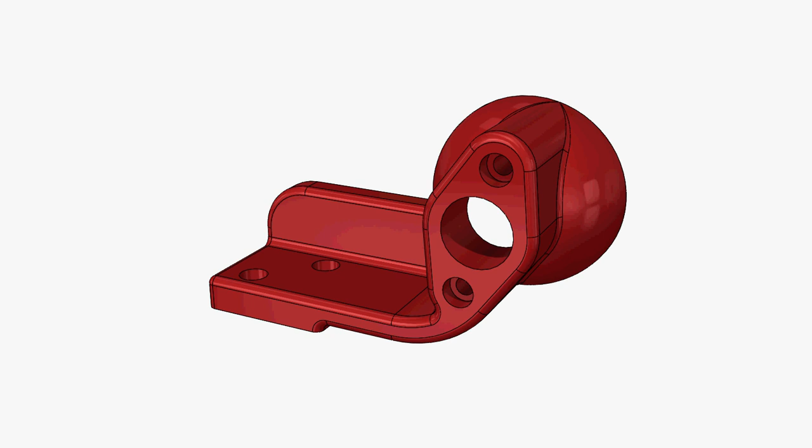In this video, we're going to take a look at creating this part from the Model Mania Design Challenge at SOLIDWORKS World 2013. If you're unfamiliar with Model Mania, it's a design challenge held every year at SOLIDWORKS World where you're given a drawing similar to this and tasked with creating the part in SOLIDWORKS both as quickly and as

accurately as possible. Now, if that wasn't challenging enough, when you're done, you're given a second drawing that entails many design changes, which again, you need to make as quickly and accurately as possible. The real catch is you never know what those changes are going to be.

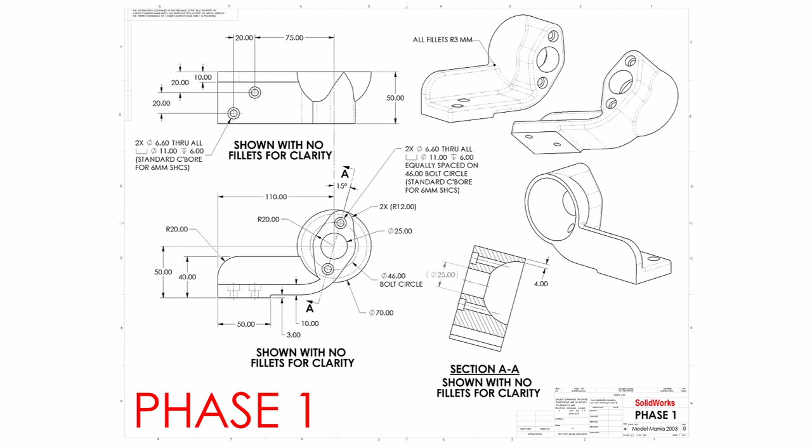So let's go ahead and take a look at this drawing and some of the features that are going to go into this part. The first thing you'll notice is there's this combination of a dome and a flange that are both detailed out extensively in this front view. They can also be seen very clearly in the isometric view in the upper right hand corner.

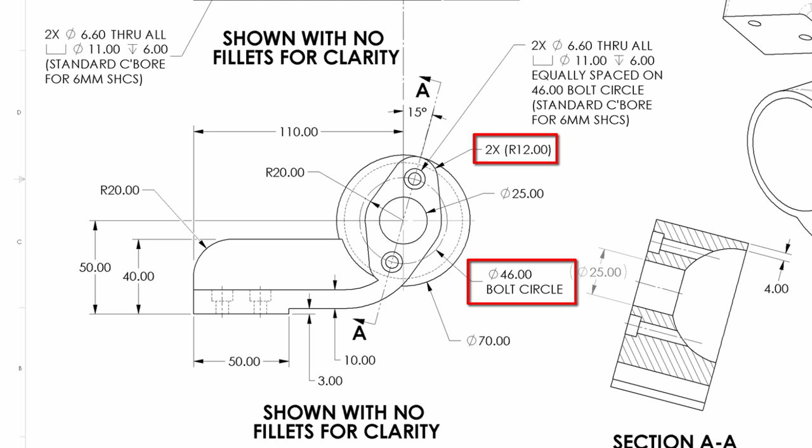Of note are a few key dimensions. Notice that the center of the circles and the arcs of the flange feature are defined by a 46mm bolt circle dimension. You'll notice that the radius here is defined in parentheses, meaning that it's a reference dimension. Specifically, that arc needs to remain tangent to the 70mm diameter circle. So that gives us some direction for the order in which we'll create these features.

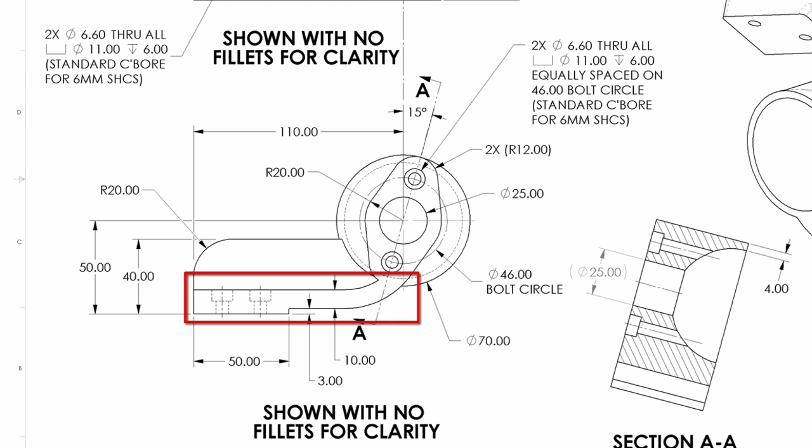The next main feature is this ledge that kind of comes off from the bottom of this part. We'll want to make sure that we tackle this appropriately, and there's a few unique ways you can look at approaching this. We'll take a look at a few different methods. And then finally, the wall on the back side with a fillet, and then several holes and counterbores that go into the part. So let's go into SOLIDWORKS and get started by creating a new part.

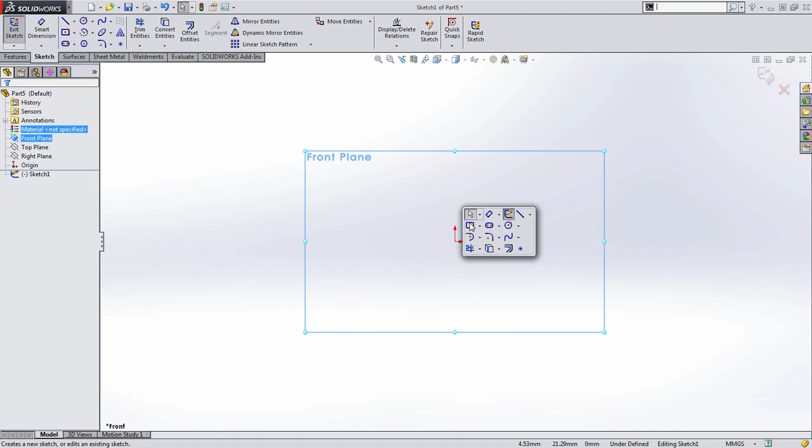Now, I mentioned that the bolt circle of that flange is defined somewhat by the dome feature itself. So that seems like a good place to start. I'm going to draw this on the front plane because I want to draw this from the orientation that we're looking at it. And I'm going to start just by drawing a circle and specifying the 70mm circle here.

Now, what I want to do is I want to revolve this. So I'm going to draw a line down from the middle. And to make things easier, I'm just going to trim half of that circle away. The reason I'm going to do that is because when you do a revolve of a circle, you only ever want half of a profile.

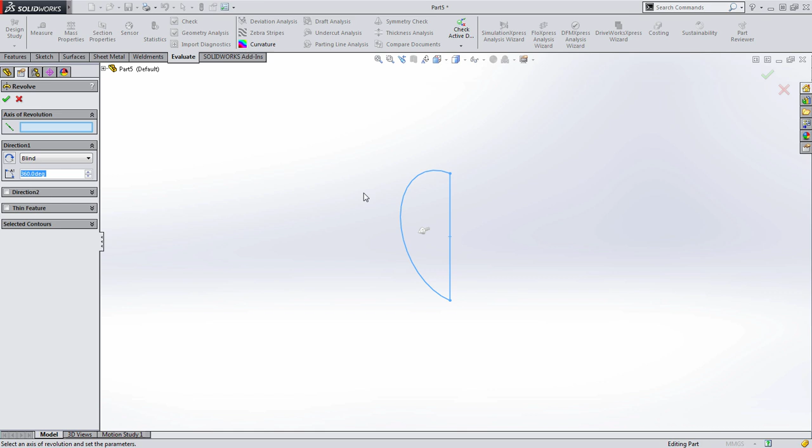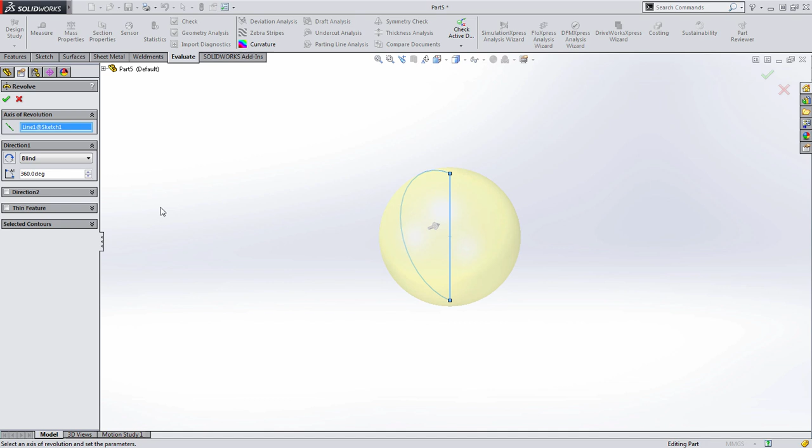Now you'll notice up in the property manager that no axis of revolution was specified. This is because we didn't have a construction line inside of our sketch. That's okay. We're going to select this vertical line that we just created. Now notice that it's creating a full 360-degree sphere. We don't need that. We only need 180 degrees, so let's type that in. In this case, it's revolving away from us, and we want it to revolve towards us. So we'll flip the direction and then press OK.

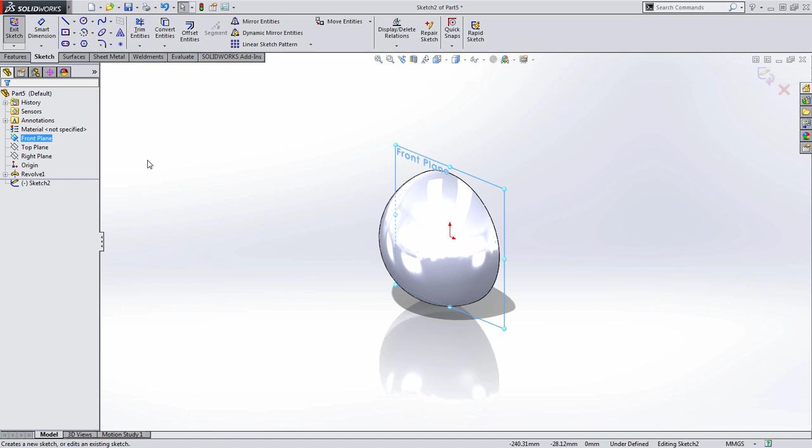So we have that first feature, and this really gives us what we need to create the next feature, which is going to be this flange. Again, I'm going to draw on the front plane. I really find planes to be a much better surface to draw on when possible than, for instance, the back face of that part.

Now, this flange profile is a very common thing to create in mechanical design. It usually consists of a circle surrounded by two smaller circles and some tangent lines. Let's look at how we do this in SOLIDWORKS. The first thing I did, as you notice really quickly, I went ahead and created the circles.

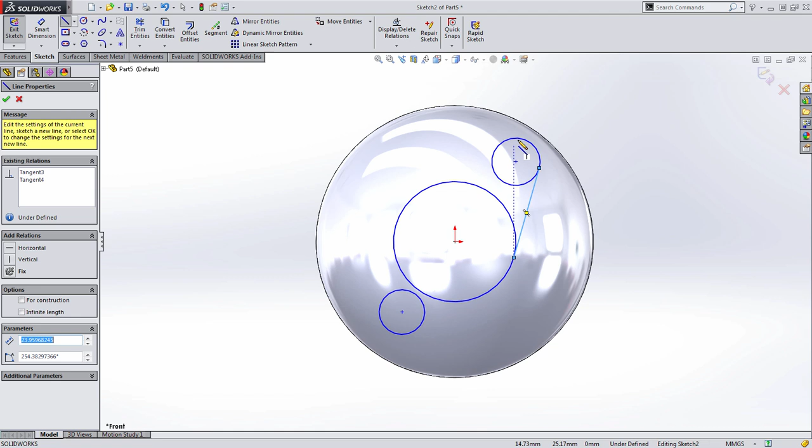Now I'm going to draw some lines. You'll notice that if you click and drag a line off of a circle, SOLIDWORKS maintains the tangent relationship. SOLIDWORKS also, when hovering over an arc, will try to snap to the tangency if possible. So we're going to replicate that 4 times in this case. I'm going to draw these 4 lines, snapping them to those tangent locations.

There I missed it, so I'm just going to go ahead and delete that, and I'm going to redraw that this time. Looks like I'm struggling pulling that straight out of there. There we go. We got it the right way this time. And we've got what we're looking for.

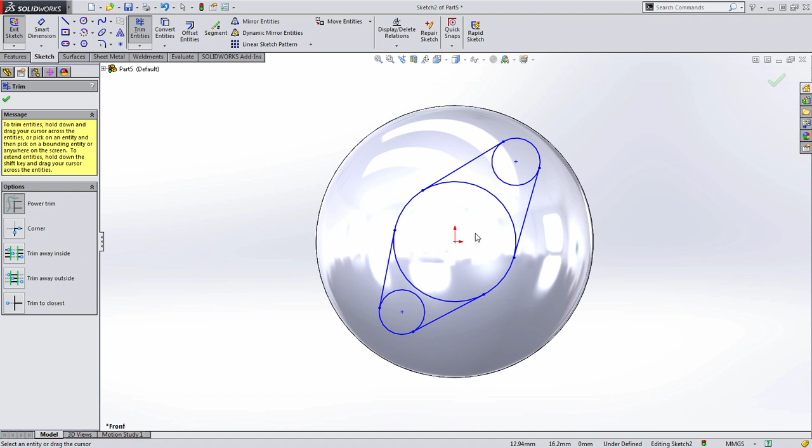Now there's a few things we can do at this point. The first one is we can trim this out. Now we don't have to. We could leave those circles and we could use contour selection later on. But I want to show a few things we can do here. One of the next things we want to keep in mind is that these two arcs need to be the same radius. So by holding the control key and selecting those, I can choose equals in the pop-up menu.

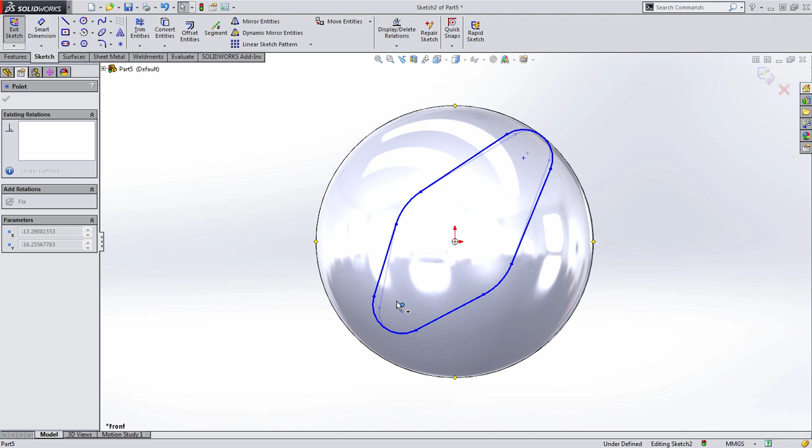Likewise, I know that this arc needs to be tangent to the outside arc of this sphere. So I'm going to select those two entities and choose tangency. Now you'll notice what's happened down here. Notice that this arc is still free to move. That's because they don't have to be the same distance off from the middle. A great way to capture this is with a center line between the two circles and then create a midpoint relationship to the center of the center circle. And now you'll notice that they always maintain the same distance.

Now there's several dimensions still missing here. Let's go ahead and quickly add this radius, which we know is 20. Now, I could type in this value of 23 millimeters, but that's not what we're given. We're actually given a bolt circle diameter. And you could do this several ways. You could just dimension the length of this, for example, and in this case it's 46, and that's going to capture it.

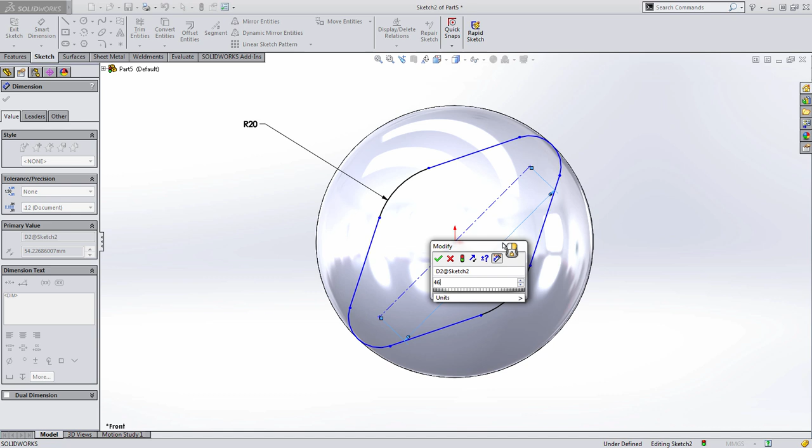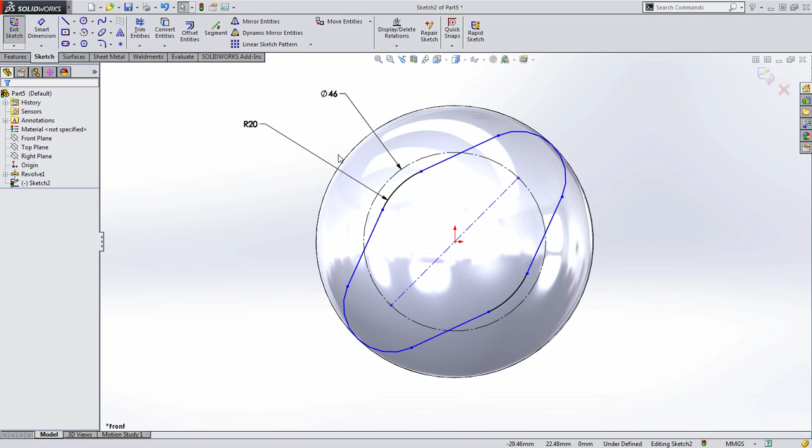Or if you really wanted to capture this in a circle form, you could draw a circle out from the center, snap it to this point, but remember you'll probably want this to be a construction line so it's not included in the extrusion. Now you'll notice that when I dimension this, we're dimensioning this by a diameter value as opposed to a linear value. Now the last thing that we need to capture here is this angle. You'll notice that it's free to move.

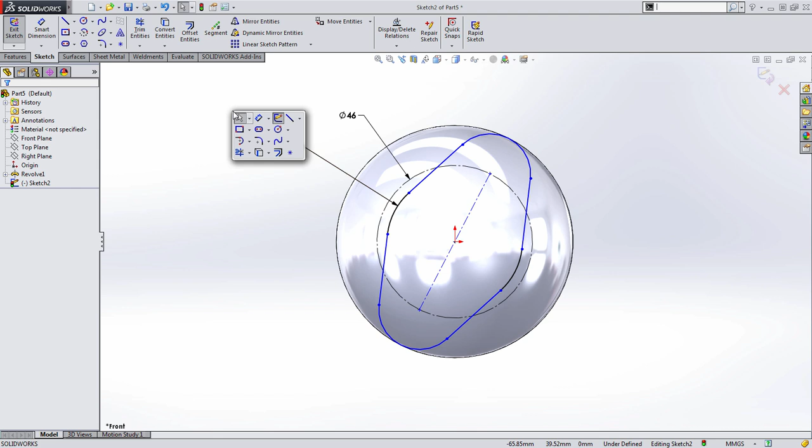Now there's a couple ways you could do this. You could draw a center line vertically straight up and then go ahead and add a 15-degree angle there. But another way you can do this without needing to create that construction geometry is you can actually dimension to the system planes. Notice that my right plane happens to fall vertically when we look normal to this sketch. I can select the right plane and that construction line and create the same dimension we did before. That's a nice way when you want to avoid excess geometry. All that's left in this case is to go ahead and extrude this, the thickness of the part, which is 50 millimeters in this case.

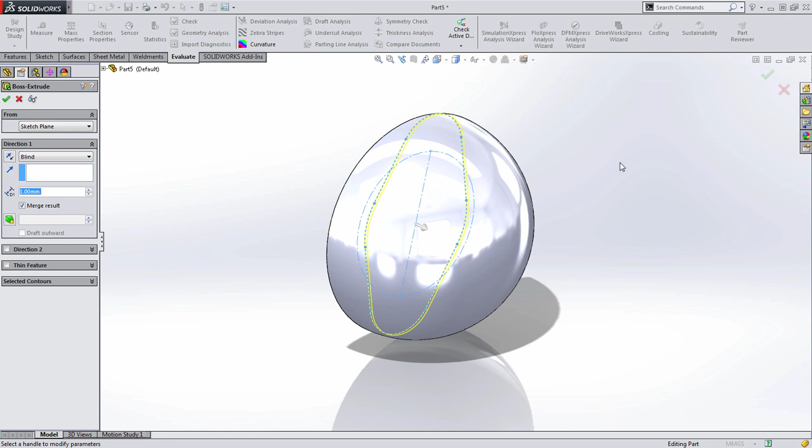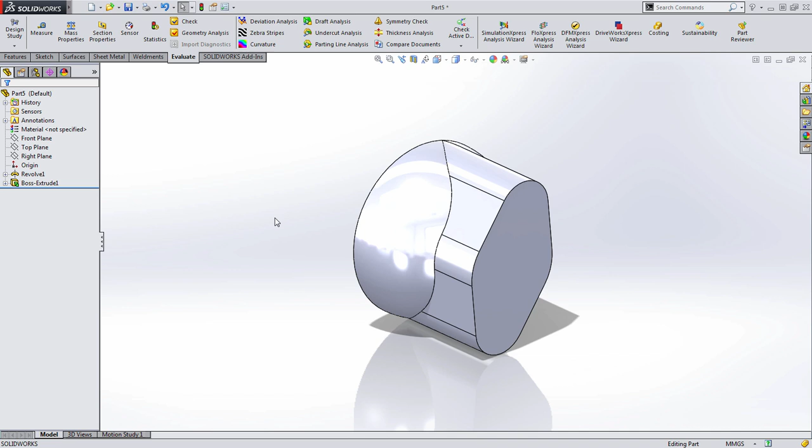Now let's go back to this drawing. This ledge at the bottom can be created multiple different ways. It could be done with thin features, multiple profiles, etc. We're going to take a look at a few different ways you could do this. One of the first ways is using multi-body. We can start with that ledge on the outside working with known dimensions. I'm going to go ahead and start with a sketch on my front plane, and we're just going to draw a rectangle out here in space. We want the 3 millimeter offset off from the bottom and the 50 millimeter width.

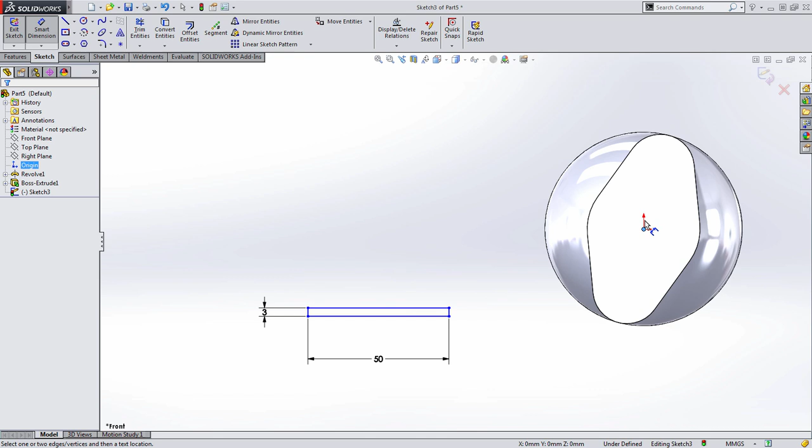Now you'll notice I know the dimension from the center to the bottom is 50 millimeters. Conveniently, my origin is located at the center of that circle. That wasn't by coincidence. That's because we intentionally drew everything from the center. Now again, I'm going to go ahead and dimension from the center, and this time we're going to dimension to the outside here, and we're given 110 millimeters.

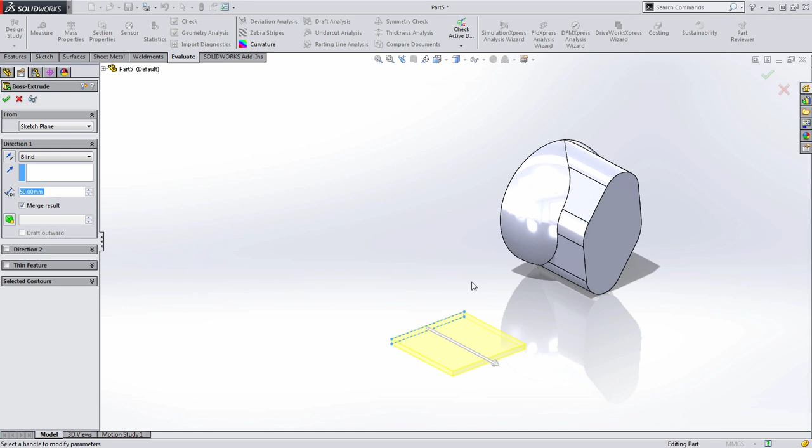Now you'll notice what I'm going to do here. I have a sketch floating out in space. We can go ahead and take this and choose to extrude, and I'm going to just go up to this face. Now the reason I use up to the face is so that if this thickness ever changes, notice that that platform always maintains that same distance. Let's go ahead and type in 50 to restore that.

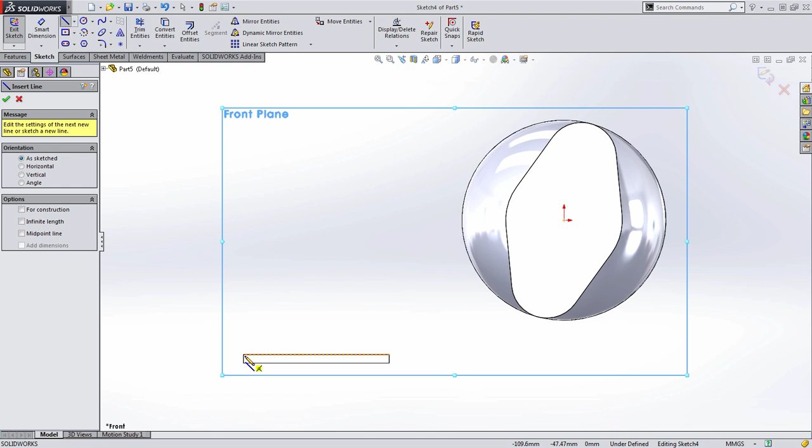Now how do we tie these together? This is where the thin feature really comes in. What we're going to do is we're going to draw a line straight out horizontal, and I want to convert to a tangent arc. An easy way to do this in SOLIDWORKS is to just move your cursor back to the line and come straight out. And in this case, I'm looking for that vertex there.

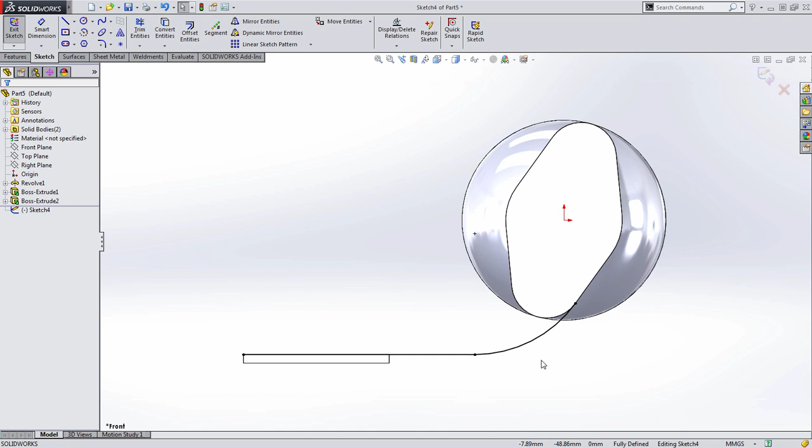I'm going to just drop this here for right now and go straight back to it. And I'm going to manually select these two and choose coincident. And I'm going to grab that edge and that arc and make those tangent. That might have been a little bit confusing to see on the drawing, and I do apologize for that. So we've got that done.

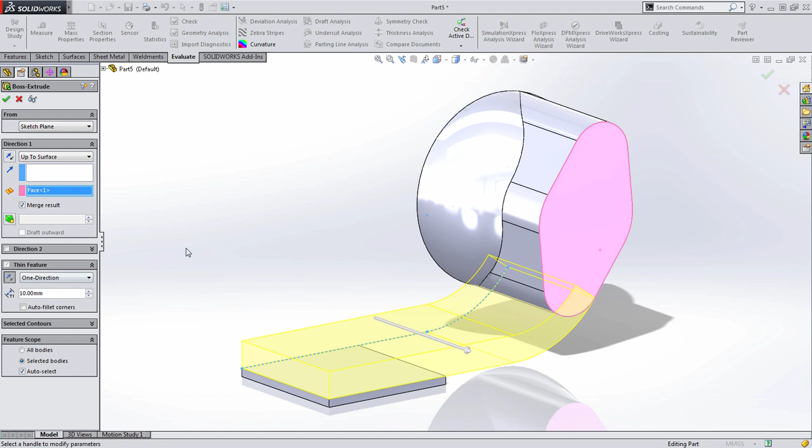Let's go ahead and now use this. Like before, we're going to do an up to surface just so we always maintain that relationship. And notice here, SOLIDWORKS has automatically recognized we want this to be a thin feature. All we have to do is specify that width of 10 millimeters and set it in the right direction and press OK. So there we've done that with a combination of a multi-body and a thin feature.

Another way we could have done that, let's go ahead and delete both of these, is let's go back to this sketch right here. I'm going to keep that dimension that we're working with in this case, and notice what I'm going to do. I'm going to actually draw over top of this, and you could do this a variety of ways. We could have done this all in one sketch.

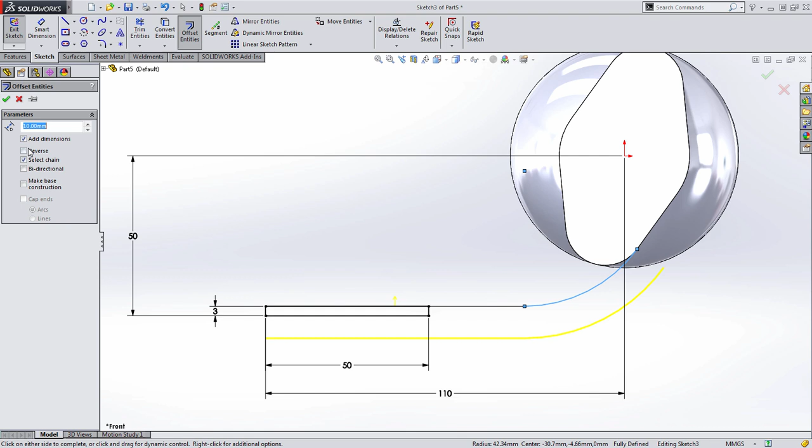I'm going to go ahead and make this tangent here and here, and then in this case what we do is we're going to offset this 10 millimeters. We're going to reverse the direction, and let's go ahead and close that, and then let's go ahead and cap the ends. Now one of the reasons I don't like using this is there's a lot of extra geometry. Notice the thin feature was a little bit easier.

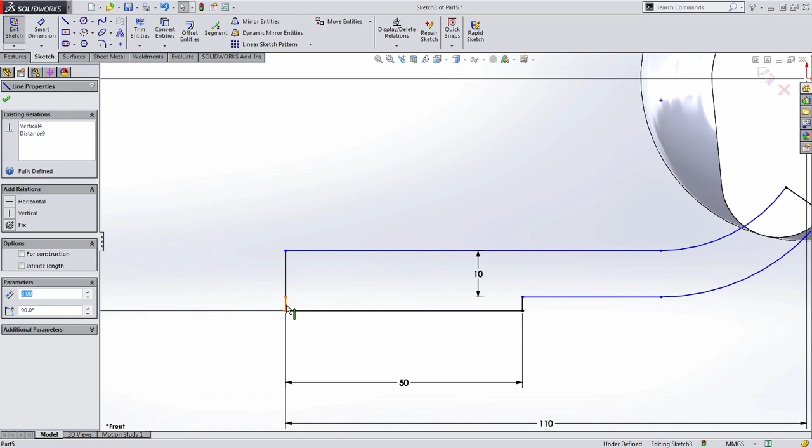And then what we can go ahead and do in this case, we can get rid of all that extra geometry in there. And in fact, let's change the way this is done a little bit. Oops. Let's extend that. Let's do trim to closest, and we'll choose to extend. There we go. And then we could have done this all as one profile as well.

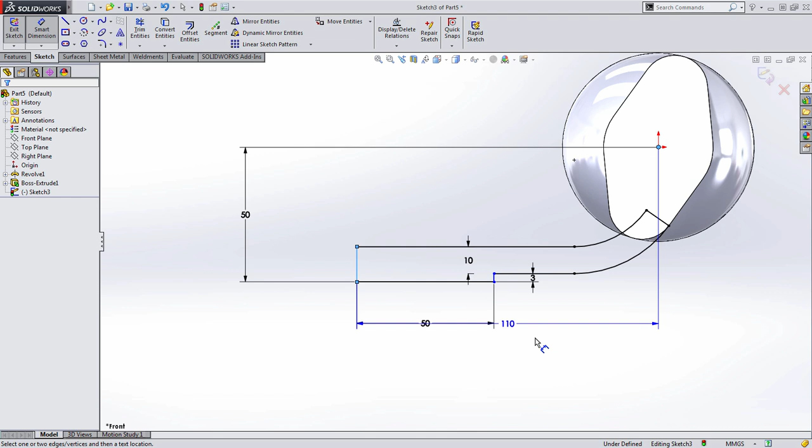So many different ways you could have tackled this same challenge. I just showed you several different ways you could have done it. We could have actually kept that feature the way it was with the extrude up to next, but I wanted to show you a variety of different ways you could have handled it. There you go. Let's go and look at creating that back wall now.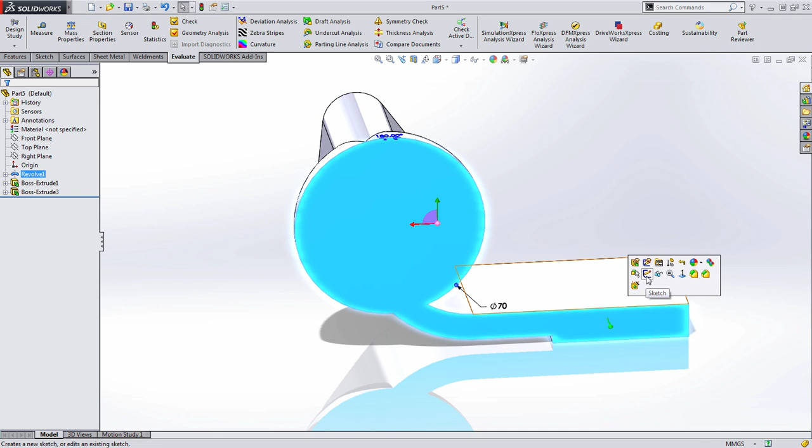Again, I'm going to draw this on this face. Actually, I'm going to show you some of the advantages of drawing on a face. We're going to reuse some of this geometry. So I'm going to use convert entities. Notice what that's done. It's copied that geometry onto this profile for us here.

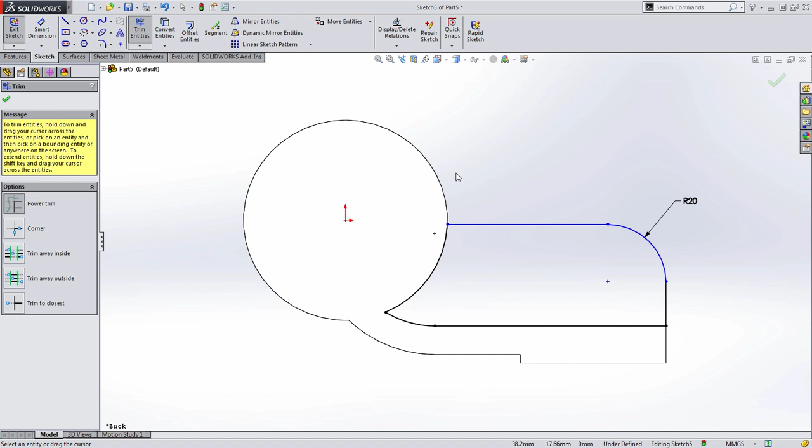And then all we have to do at this point is draw basically the rest of that rectangle. And then let's go ahead and add a fillet in this case of 20 millimeters and trim the rest of this geometry away. We'll use power trim for that. And a height is given to us here, 40 millimeters off from the bottom. So there we go. All that's left for us to do is choose to extrude this, make sure it's going in the right direction and the right thickness.

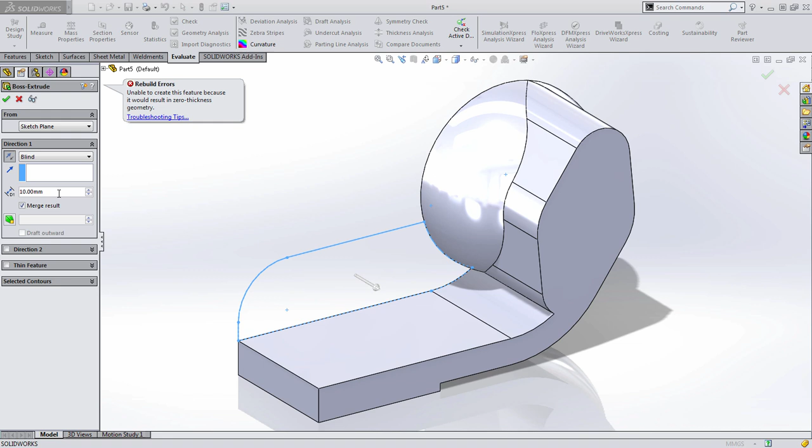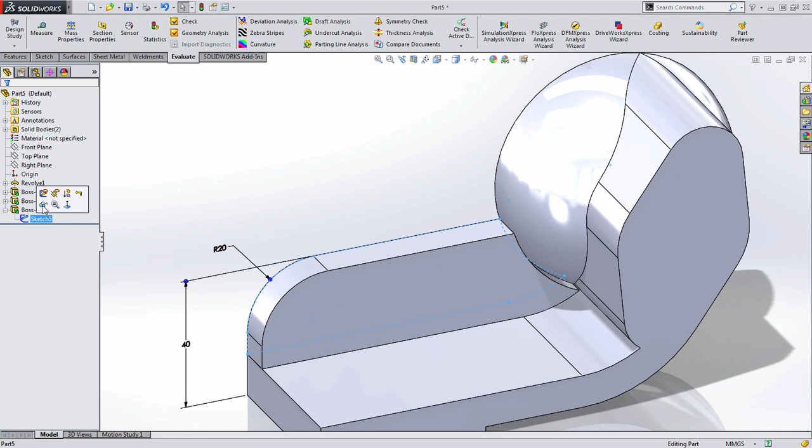Now look what's happened. We have a bit of a problem here. It actually can't create the extrusion for us, and the reason is something called zero thickness geometry. And that's because when we extrude this up, we're going to create this tiny little wedge down here. If I uncheck merge results, it's easy to show what's happening. You get to a spot right here where there's actually virtually no material. So how do we solve this in this case? Well, one of the ways we can do this is by changing the way we create this sketch.

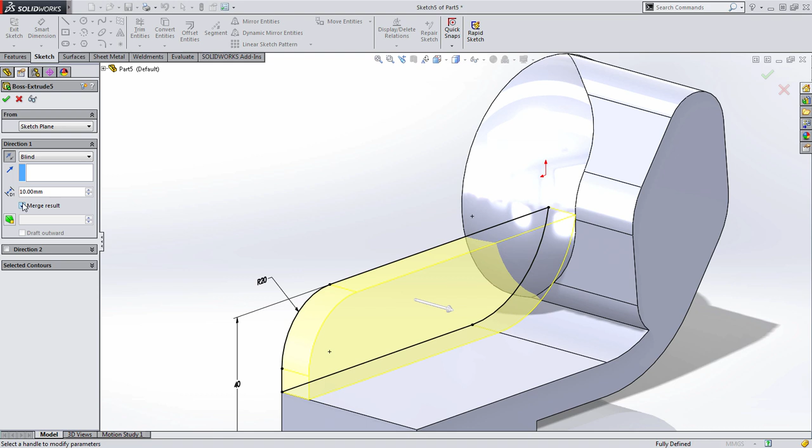And I'm going to do that by just simply continuing this geometry up. What I'm going to do is create a corner trim between those two entities. And now when I close this, you can see it brings them together. Now one of the things we want to do is change that from not merging to merging with one another, and that'll join all that material together in that location. So a couple things to watch out for right there.

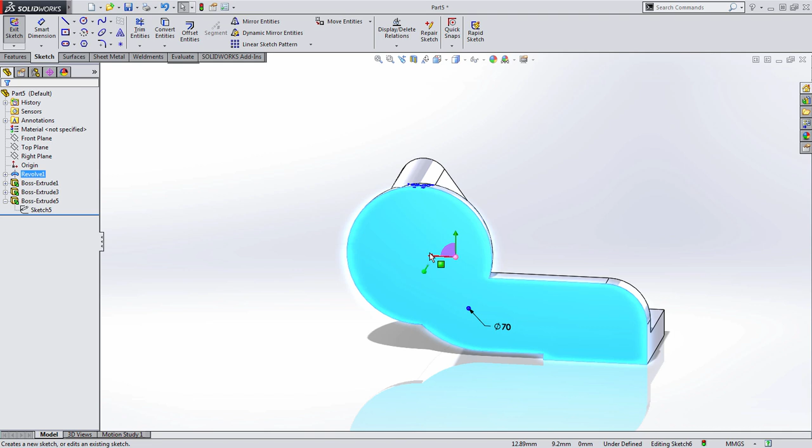So we've got that done. What do we need to do next? It looks like we need to add some holes and some counterbores. So let's go ahead and do that now. We also need to hollow this out on the back side. So let's go ahead and draw a sketch here. We're going to do this very similar to the way we did it before.

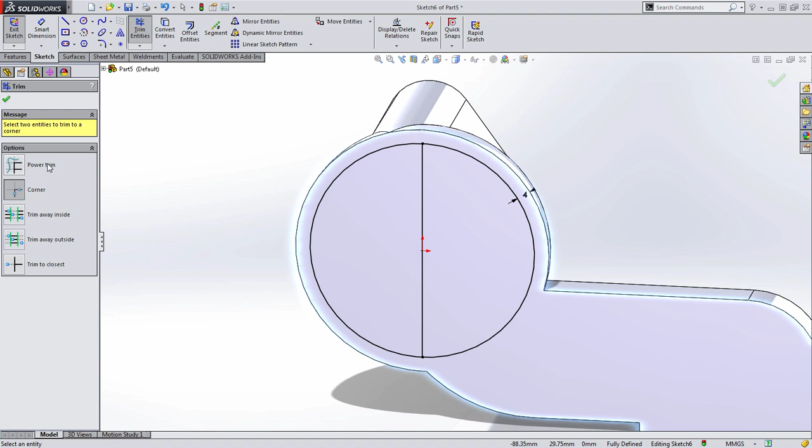We could do this with an offset, but I'm going to dimension the circle off from that outside edge. I like to create it this way because an offset wouldn't give us a full circle and we might not get exactly what we're looking for. But we're going to create this identically to what we did before by trimming that outside. And this time we're going to choose cut, obviously, instead of extrude. And again, choose that center line as the axis of revolution.

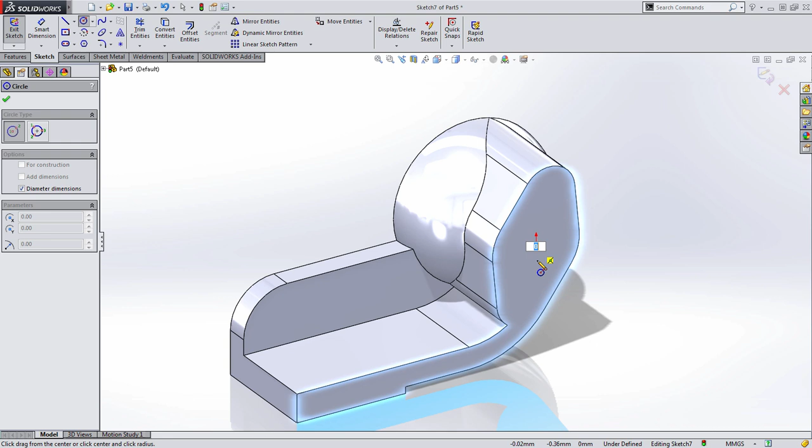Notice this time we don't need to limit the angle to 180 degrees because a full 360 cut is going to give us exactly what we're looking for. There's also a cut that comes off from this top face right here, and that's a 25 millimeter diameter. Let's enter that value in. I typed in the wrong value. And let's go ahead and choose to cut, and from the right click menu I'm going to choose through all and right click to confirm.

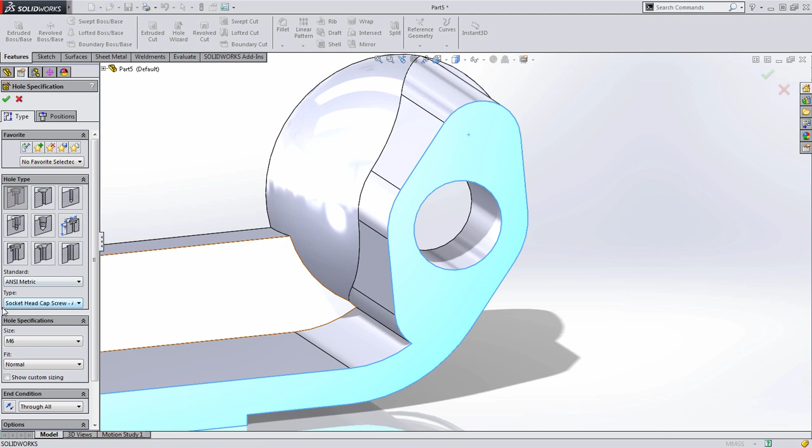The last thing we have is a series of counterbores and then some fillets we'll have to get to. Now, I'm going to create these counterbores right now, and then I'm going to go back and show you how order of operations can affect this. Let's go on this face. I'm going to create a counterbore, and you'll notice it gives you all the dimensions, but notice at the bottom it says standard counterbore for a 6 millimeter socket head cap screw. So we've got all that information already specified. Notice the end condition through all.

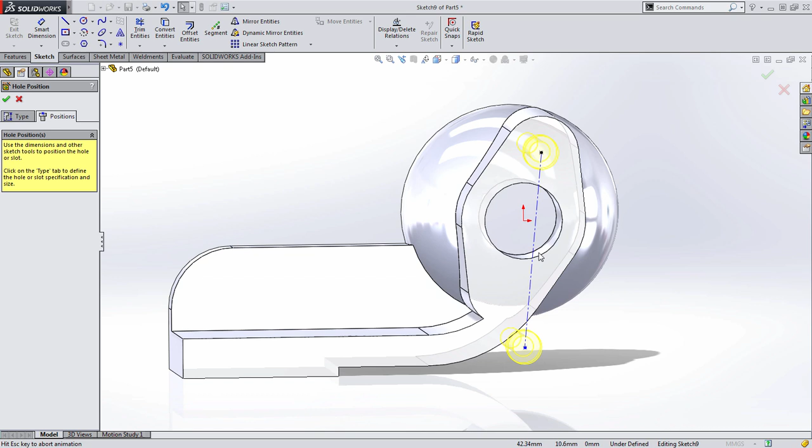And for positions, we're going to snap this to the middle. You'll notice here I have a little bit of trouble grabbing that edge. Well, here's an example, again, of where you could use the construction line trick that we showed you earlier to tie two things together. You'll notice now I can snap this to the origin, and when I make those midpoints, that's always going to fall the same distance away. Let's go ahead and confirm that.

And then we have two counterbores on this top face right here. So let's go ahead and add those as well. They're the same size, so we're just going to create these and put their positions in place. Now what I want to do here is dimension; this is 20 millimeters off from the back edge here. They're 20 millimeters apart both vertically and horizontally. So we're just going to dimension from point to point.

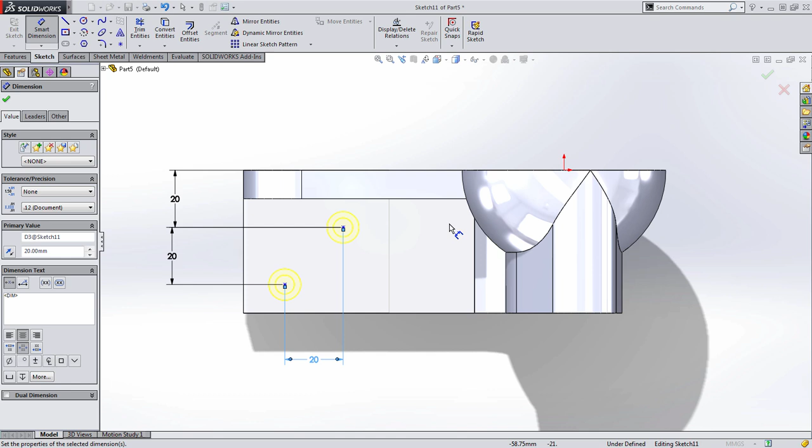And then finally, there's a distance off from the center of 75. Again, I'm going to use the origin to dimension to here because it's something easy to pick and it never moves or changes. So let's go ahead and press OK. And we pretty much have everything we have in the orthogonal views, but notice in the isometrics there's lots of fillets that go on this part. So let's go about creating those now.

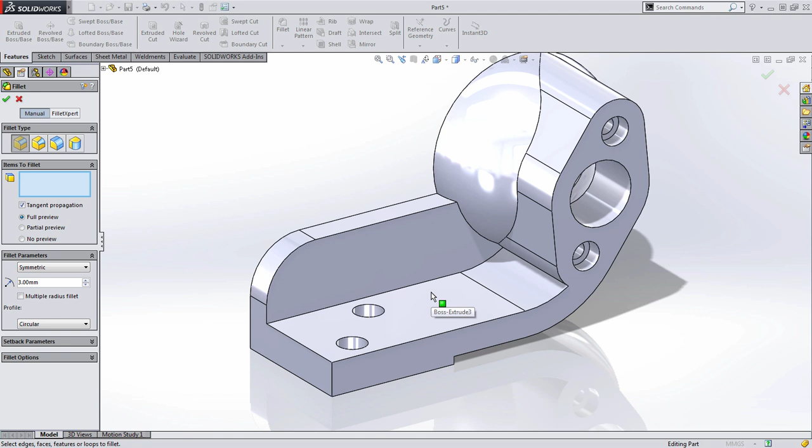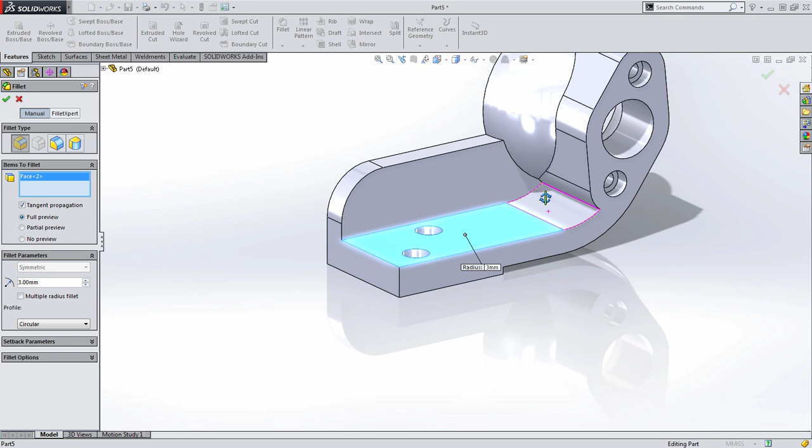These are 3mm fillets, so we'll enter our radius. And if you've watched the previous videos, you probably realize I really like grabbing faces. One of the reasons is faces capture a lot more geometry in one pick than grabbing individual edges. The problem with grabbing faces is sometimes you can't create them, and the reason is it's trying to create a fillet on this edge right here. If you remember a moment ago, I said one of the things we could do is change the order of operations.

Notice the difference if I, before this fillet, now try to create that 3mm fillet. SOLIDWORKS has no problems creating that, though in this case you'll still need to grab that corner. We do want to grab these edges right here, and we'll want to grab these right here.

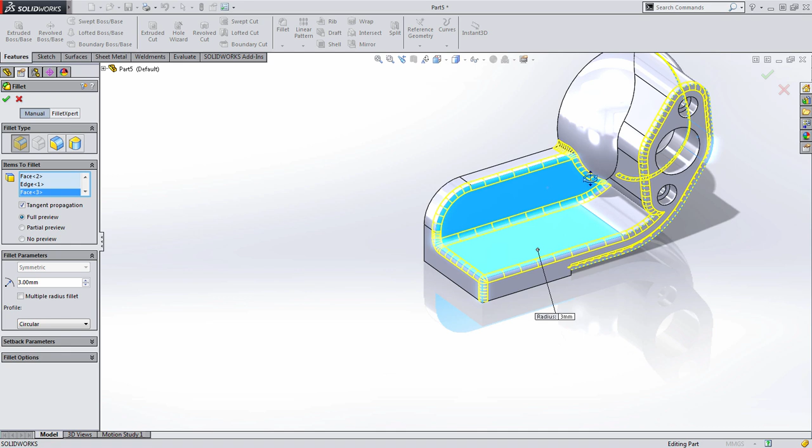Now you're probably wondering why this face specifically. Well, if I grab this face, it's going to try to put a fillet on that outside edge, which again, it doesn't like because of the way this fillet blends in right there. We also have a fillet on this inside edge right here. I'm going to go ahead and grab that face right there. And it looks like we have them all except for that one right there.

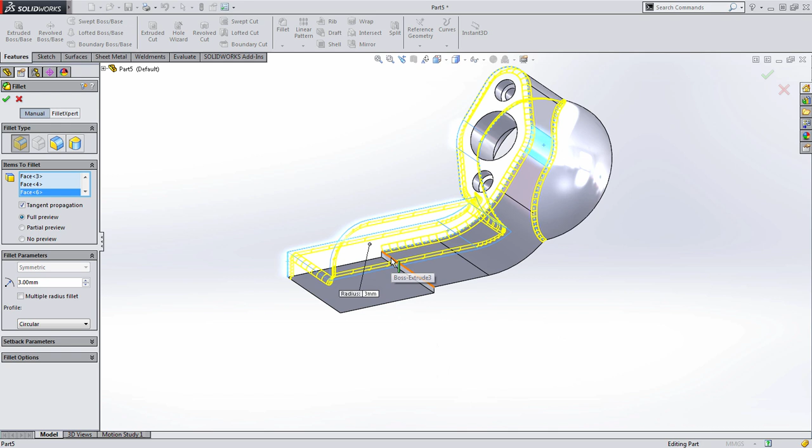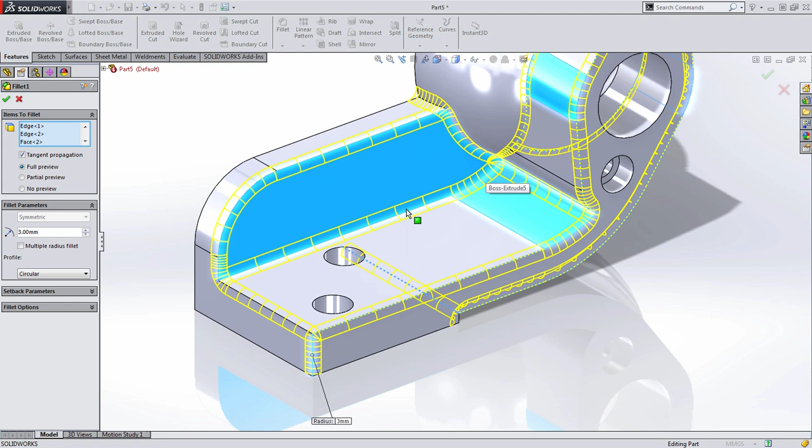Now, what if we wanted to keep that order the same? So for example, I create my counterbore and I want the fillet to come at the end. Notice it's going to give me a warning here. All we need to do is choose not to create the fillet on that face. And notice because I chose this face, the tangent propagation option allows the fillets to continue the way we had them before. So just a few tricks there when working with fillets. Keep in mind the order you create them can have an impact on how they look.

So there we go, we've got our whole part done. Everything looks great, so what happens next? We're given phase 2 of the drawing where we need to make some changes. If we look at these changes, there's some very significant ones here. The first thing you'll notice is that this rib along the back has been repositioned from the back face to the front face. That's a huge change on this part.

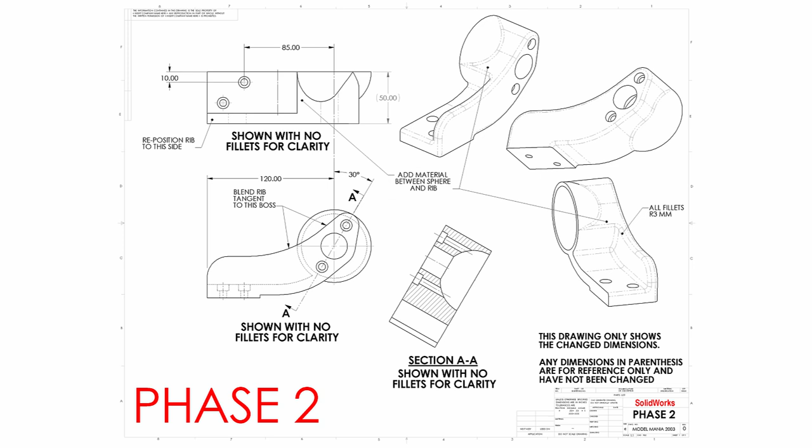Additionally, the location of these holes has been affected. We've changed the distance from the center, but also that back edge isn't there anymore, and we've changed the dimension to 10mm. Going to the front view, you can see that there's now this big tangency between that back face and that boss as well. And then finally, there's this extra material that's been added. So we've got all sorts of changes. This is a really tricky part. So let's dive in and take a look at how we'll approach this.

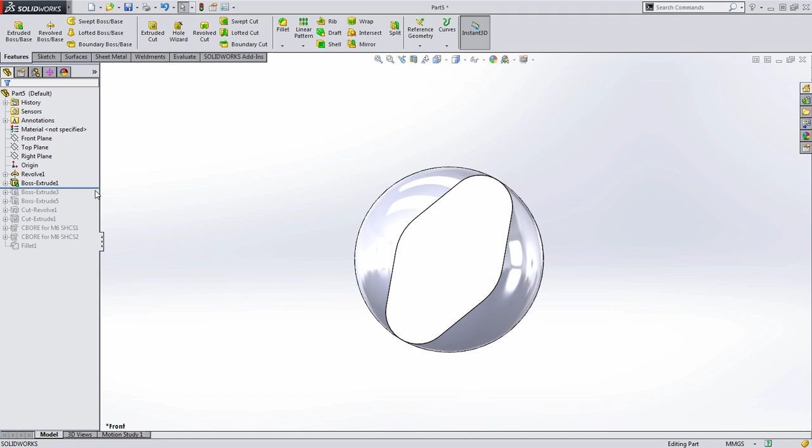One of the things I like to do in a part like this is roll back and take a look at this feature by feature. The dome hasn't changed. None of the dimensions have been affected. But if we take a look at the next feature, we do see several changes in this case. I'm going to go to a front view, and the angle of this has changed to 30 degrees. That's pretty simple. We type in the new angle, everything updates perfectly. Then when we move along, this ledge that we've created, well, conveniently, nothing about that ledge has changed. So we're not affected by that.

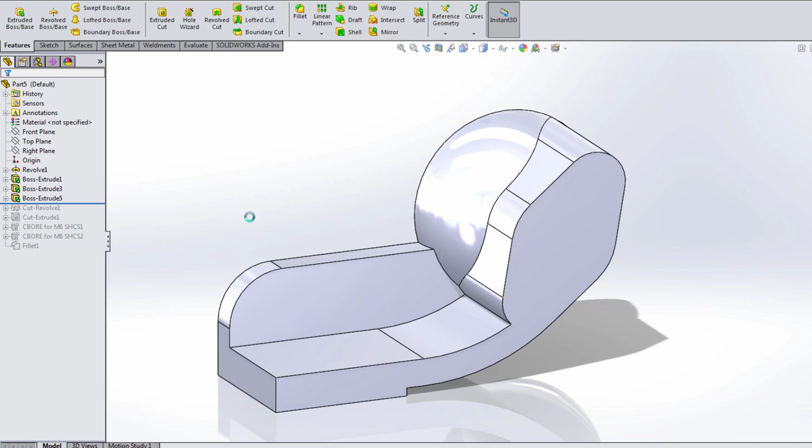Now, here's where things get interesting. This face needs to not only move from the back of the part to the front, it also has to have a rather large radius added to it. So let's take a look at how we'll tackle this. I'm going to do this by changing the face in which this was drawn on. And to do this, we have to access the sketch. And you'll notice you have the ability to edit the sketch plane.

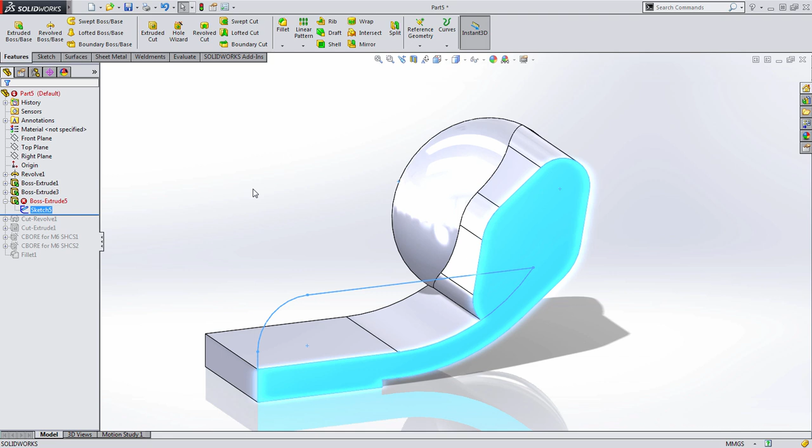Now, remember when I created that, I chose that face and I said it was a bit of cheating? Well, I knew that this was going to be created on this face. Now, when I do that, it makes the change pretty simple. It does still fail in this case, and the reason is we're going to end up with that zero thickness geometry issue right there. But if we change the direction to the inside, notice it solves no problem.

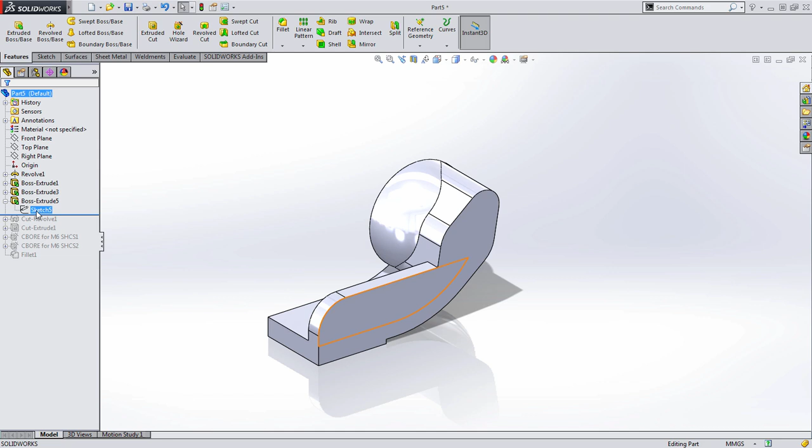But what about that fillet that we wanted to create right there? The best way to capture this is in this same sketch right here. Let's go over to this view. Let's go normal to and then normal to again. There we go. We want to create a tangent arc off from here down to here. So I'm going to go about doing this by creating a 3-point arc. This is going to require what I would call a little bit of manual work.

So we get the tangency. We need some more of this geometry. You'll notice what I'm going to do - actually, I'm going to delete that. I'm going to show you another way we could have done that. I need this arc, and this arc, and by convert entities we're going to use those.

Now when I create a tangent arc, you'll notice I can come straight off of there, so it's a little less manual than what it would have been. But down here, we still need to make these two tangent to one another.

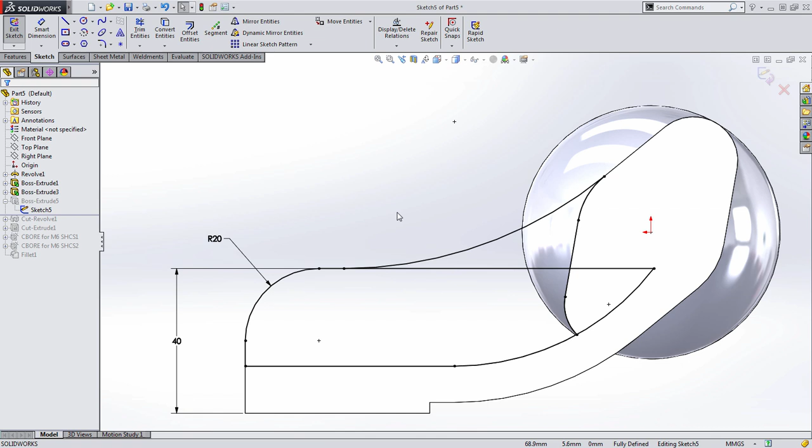Now we have a mess here that we really want to clean up. So I'm going to go ahead and access the trim tool, and I'm going to start by cleaning up some of this geometry to close that profile. And just like that, you can see if I close the sketch, we've now got that feature.

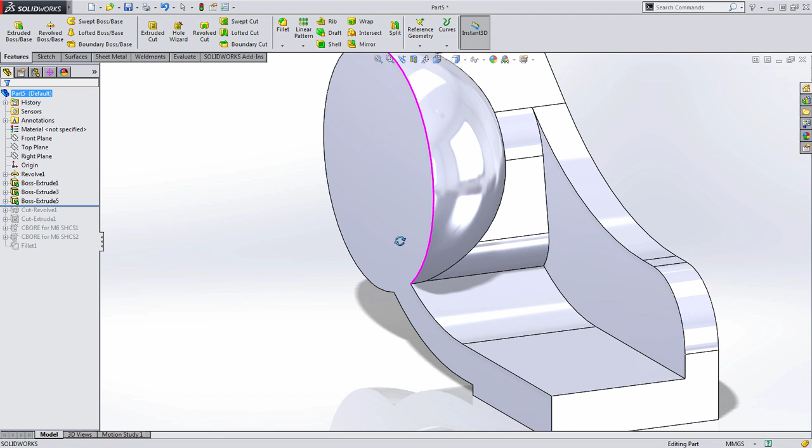Now, this doesn't mean that everything else that happens after this is going to be convenient. Let's take a look at what happens. We're going to go ahead - here's our cut, here's our cut extrude through, no problems. Here's our counterbore. Now, if you had created that counterbore to that arc, you may have had problems with that updating.

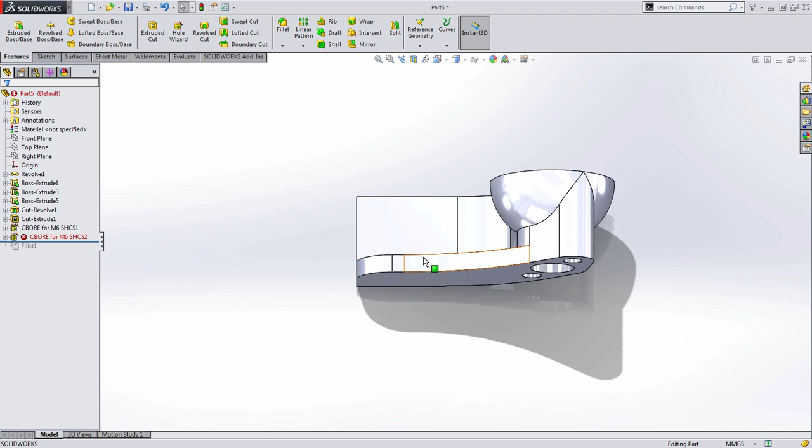What about these counterbores here? Notice they don't even appear. And that's because, if you remember, we dimensioned them to that back face of that ledge there.

So let's go ahead and look at that sketch, and notice what it's doing - it's dimensioning it to that face. But these dimensions have changed, and instead they're dimensioned off from this back edge by 10 millimeters now. And this dimension here is changed to 85.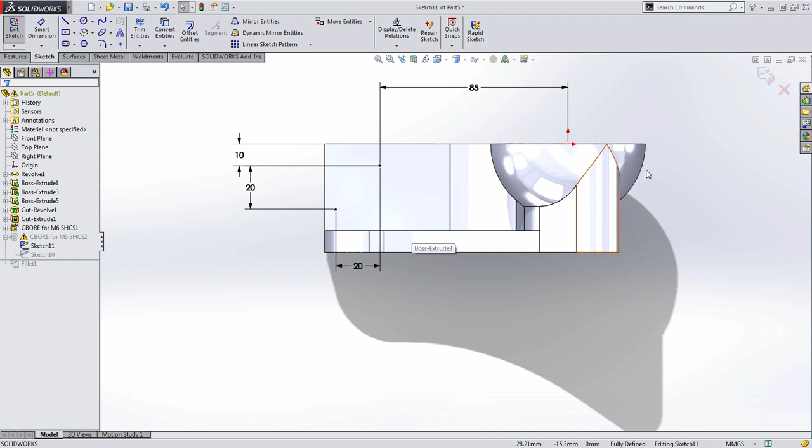I noticed that that's a little close. There was actually another change that took place that I skipped over - we missed a dimension. We need to go back here. This dimension was 20, there you go. Now you can see that counterbore made it very obvious what we had missed there.

And we're going to save the fillets for last. There's a big piece that's missing here, and that's all this material that needs to get added to the inside right here. So how are we going to go about doing this? This is a great place to use convert entities and up to next extrusions.

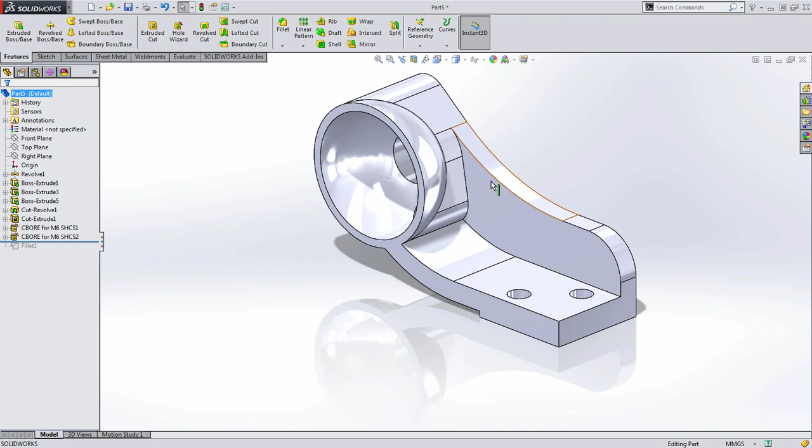What I'm going to go ahead and do is start a sketch on this inside face, and I'm going to choose to just copy all that geometry. Then we know if I look straight at this, it needs to be this intersection area here.

So here I'm going to use convert entities again, and I'm going to grab this outside arc and choose to copy that as well. Now you could trim all this up, but keep in mind, selected profiles - or selected contours rather - allow you to just select a region that you want to work with.

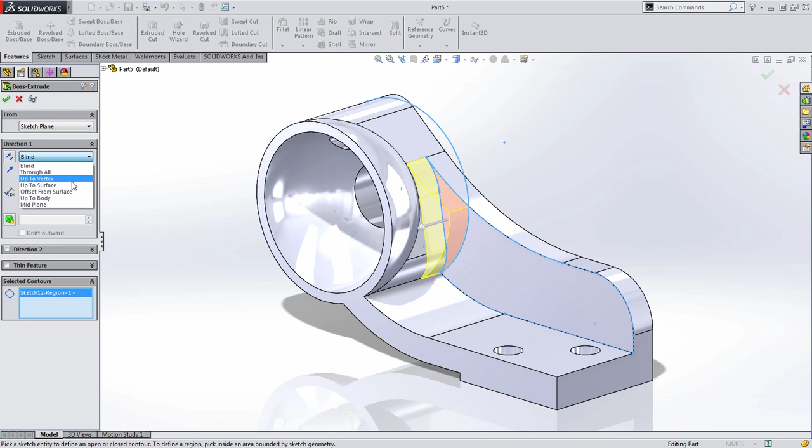Then all we need to do is choose - normally up to next would be an option here. Sometimes when it's not, you'll want to use up to body and just select the body of the part, and notice how it fills that in for us.

Now, because of that big change right there - that one more than any - we're potentially going to have problems with our fillets right here. Some of the faces that we had selected previously no longer exist, and notice it says there's a face missing. That's okay, we're going to go ahead and delete that from our selection, but it's still not solving.

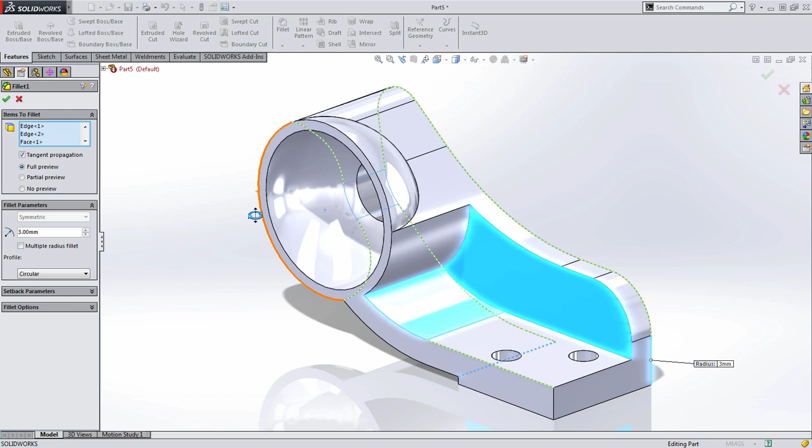Why is that? Well, now we're running into a case where sometimes you need to create fillets in a slightly different order. So notice what I've done there - I'm going to select these in a slightly different order to make sure I get what I need in this case. And there we go, it looks like it's cleaned that up. We've gotten everything we need, and everything else is preserved on the outside.

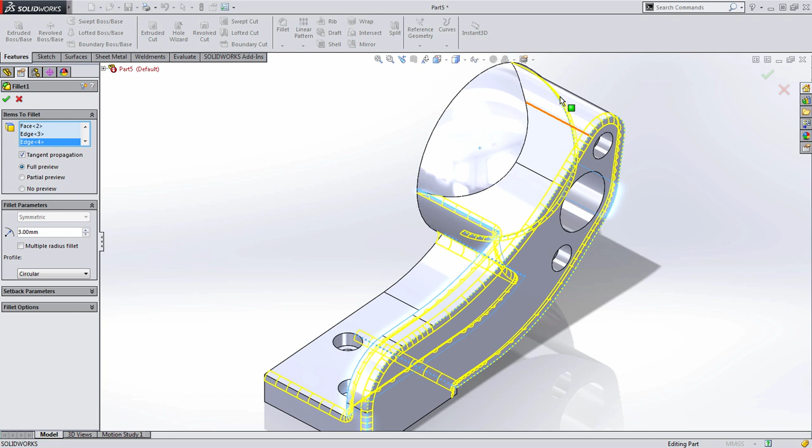All we'll have to do is, at the end, create this last fillet as a separate feature here. Now you could have done this in a variety of different orders - that's just one way you could have gone about that.

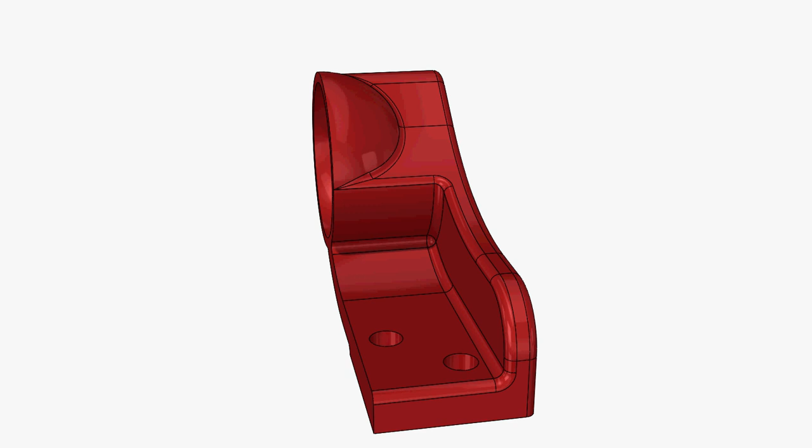So there you go - the Model Mania Design Challenge from SOLIDWORKS World 2003. This one had a lot of changes to the second phase, but hopefully you can see how SOLIDWORKS' robust capability to make changes on the fly made it not too difficult after all.